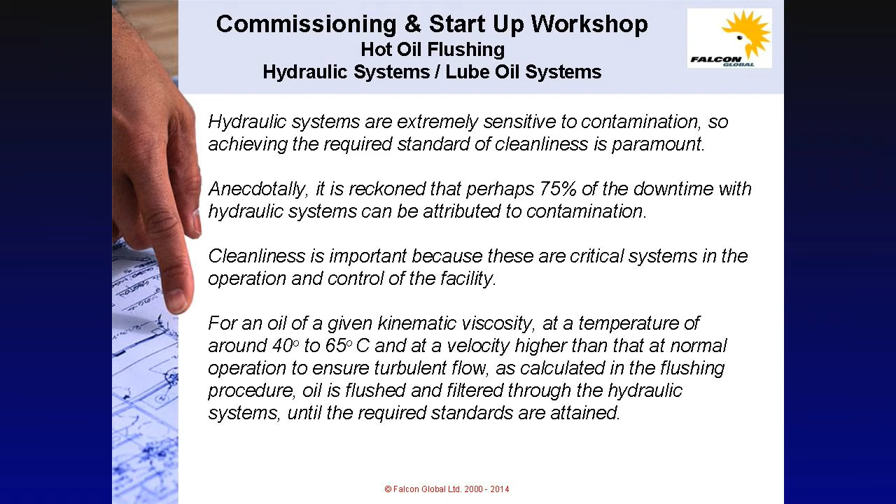For an oil of a given kinematic viscosity at a temperature of around 40 to 65 degrees Celsius and at a velocity higher than that at normal operation to ensure turbulent flow, as calculated in the flushing procedure, oil is flushed and filtered through the hydraulic systems until the required standards are attained. In theory, this can be performed either by construction or commissioning, and see the recommendations later. But it will be necessary and will take time, running into several weeks on most projects.

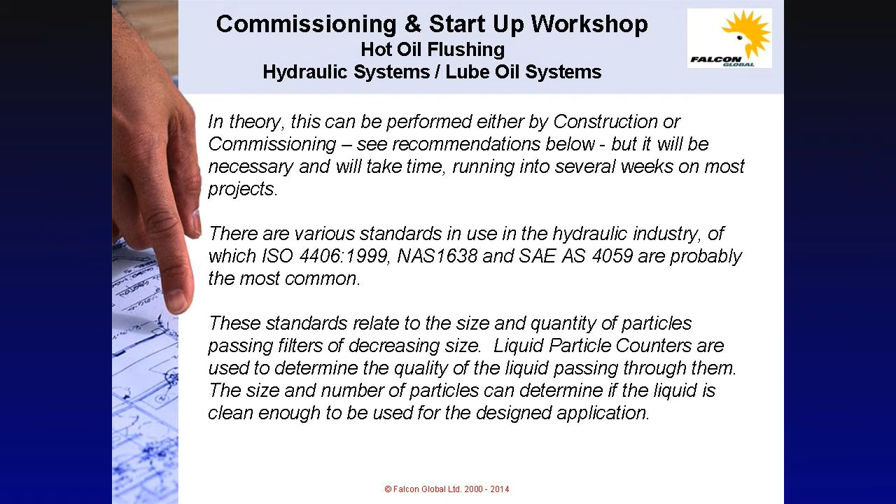There are various standards in use in the hydraulic industry, of which ISO, NAS and SAE are probably the most common. These standards relate to the size and quantity of particles passing filters of decreasing size. Liquid particle counters are used to determine the quality of the liquid passing through them. The size and number of particles can determine if the liquid is clean enough to be used for the designed application. Each project will specify the degree of cleanliness to be attained.

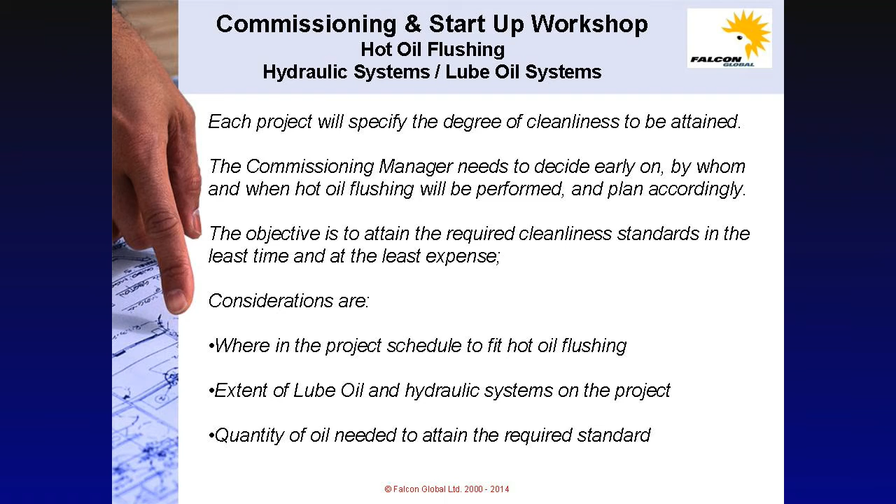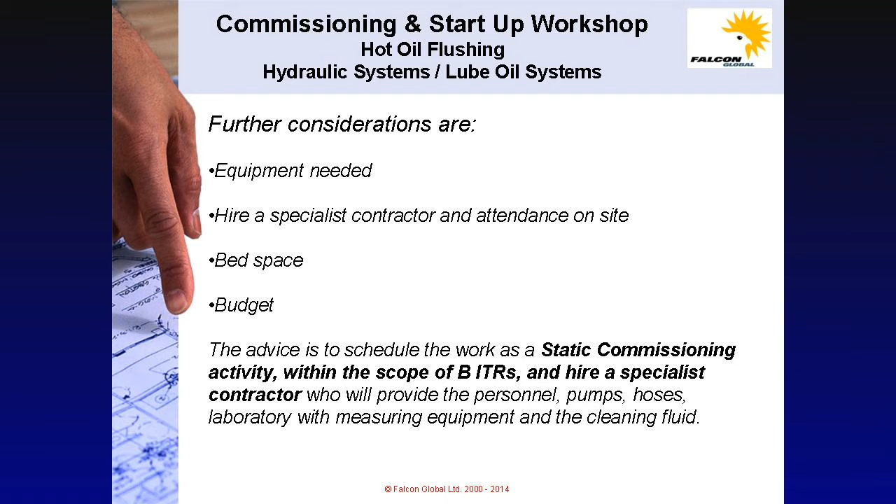The commissioning manager needs to decide early on by whom and when hot oil flushing will be performed and plan accordingly. Remember, the objective is to attain the required cleanliness standards in the least time and at the least expense. Considerations are where in the project schedule to fit hot oil flushing, the extent of lube oil and hydraulic systems on the project, and the quantity of oil needed to attain the required standard. Further considerations are equipment needed, hiring a specialist contractor and his attendance on site, the bed space and a budget, of course.

The clear advice given here is to schedule the work as a static commissioning activity within the scope of the B check sheets and hire a specialist contractor who will provide all the personnel, the pumps, the hoses, laboratory with measuring equipment and the cleaning fluid. The photo on slide 282 shows an oil flushing rig operated by IKM, a well-known specialist in commissioning and testing services.

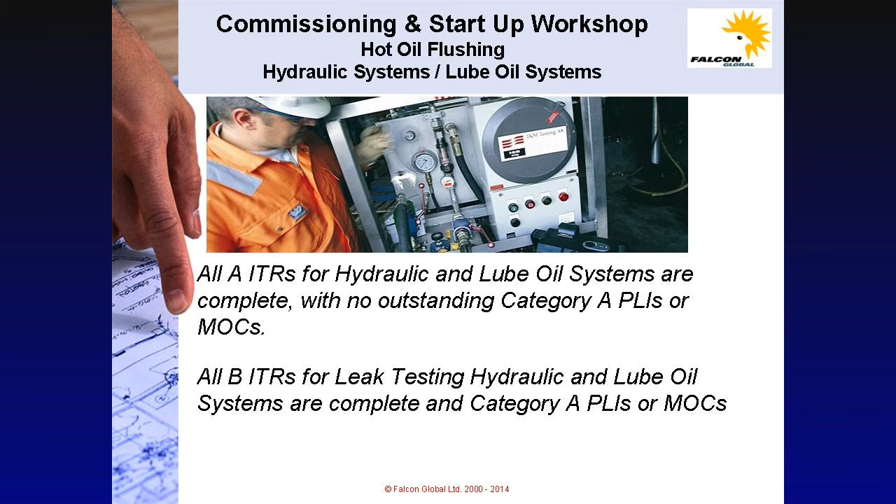All A check sheets for hydraulic and lube oil systems are to be completed with no outstanding Category A punch list items or MOCs carried over. All B check sheets for leak testing, hydraulic and lube oil systems are completed and Category A punch list items or MOCs are also completed. Look at the photo on slide 283 of a human hair and the size of particles on the filter. This is what we are attempting to remove.